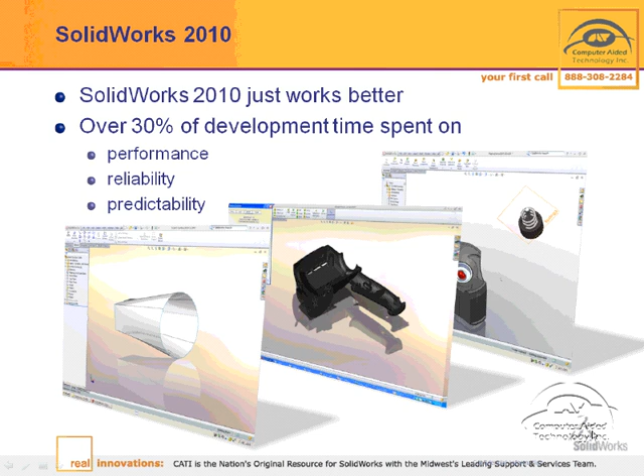We now have the first wave of the live What's New in 2010s complete, and there's just one place that I didn't like, and that was this slide that says that SOLIDWORKS 2010 just works better. I'm going to try and substantiate some of that today.

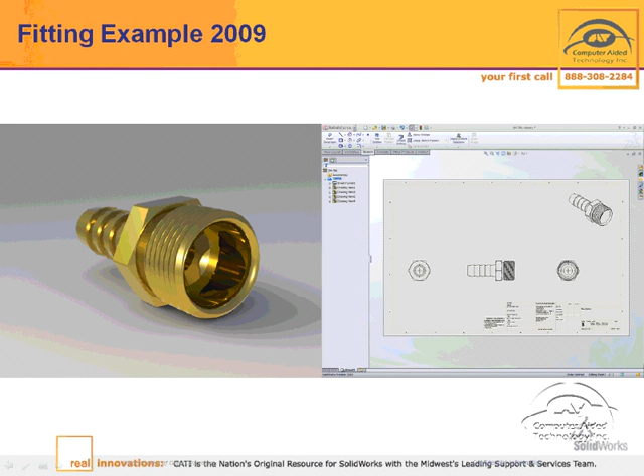This is the first example that I've run across, this fitting example in SOLIDWORKS 2009. If I create a drawing of this, you can see I can create the drawing fine, but the problem is when I try to take this front view and create a section view of it. Let me flip over and we'll look at SOLIDWORKS here, and I'll show you what happens. The problem lies within the SOLIDWORKS file itself having that helical thread on there.

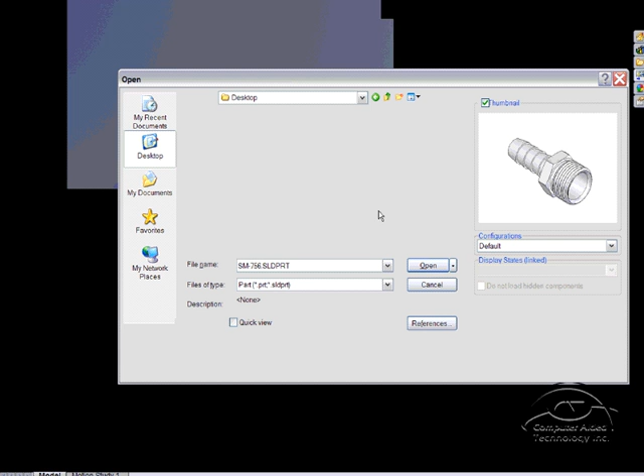Now, I'm not saying that you should put helical thread on your parts, but if you're the maker of this part, it's probably something that you need to have in the part itself. So when we look at this thing, we'll go ahead and flop this part open, and we'll create a new drawing from it. We'll take just a standard drawing template. A size is fine. Go ahead and say OK.

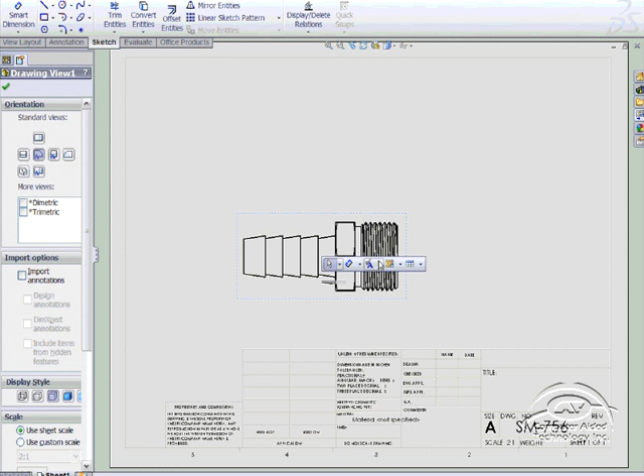And we'll flop a front view, and we'll go ahead and section that. Now, when we section this, we're going to get a couple of different errors coming up, and the first one's telling us it's a partial view. Now, realize that we're trying to section through where that helix comes around and actually tapers to 0. So the problem is kind of a zero geometry issue going on.

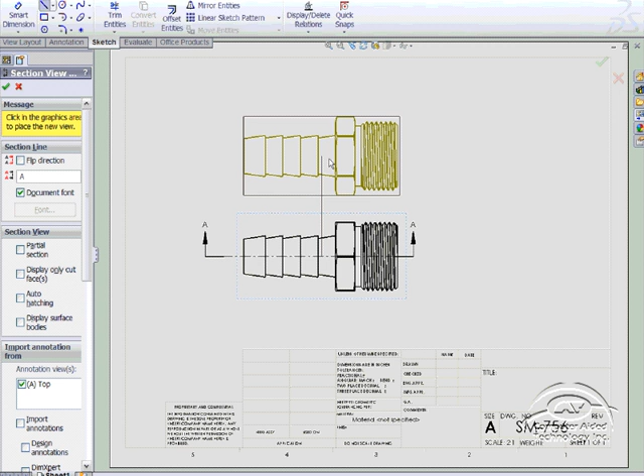It's telling me that the section line doesn't properly cut through the model. And you wouldn't even at this point be able to go back to the model and create a section cut through it. It just doesn't do it. It's a limitation of 2009 and before.

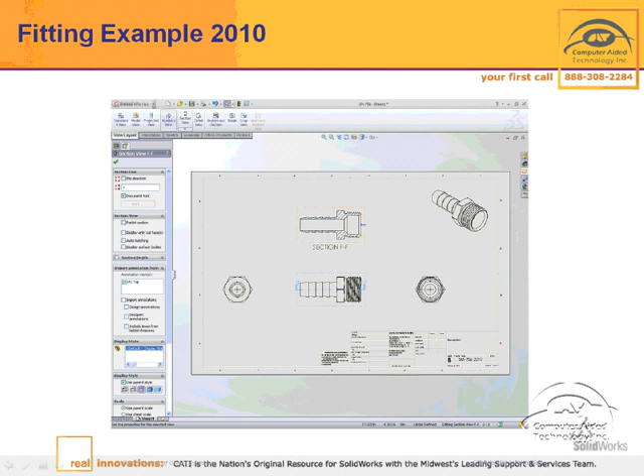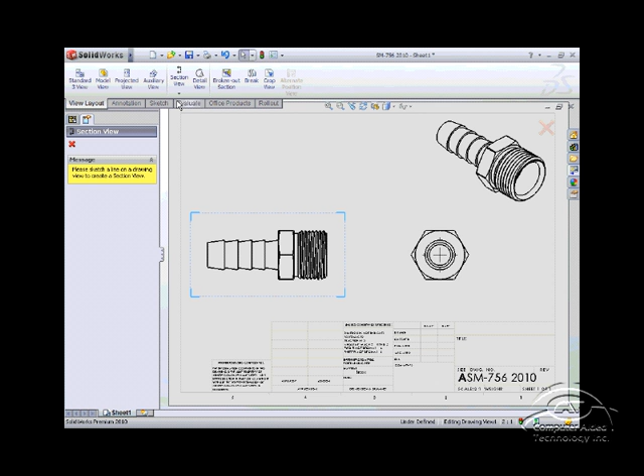If we take this same example and open it in 2010 rather, what you're going to see is that when I open this in 2010, we'll just go ahead and take a standard C-size print, and I'll create a couple of views here. Now I'm going to go ahead and grab the section view of this one. We'll go ahead and make a section of the model. And what you're going to see is that SOLIDWORKS 2010 does it without a problem.